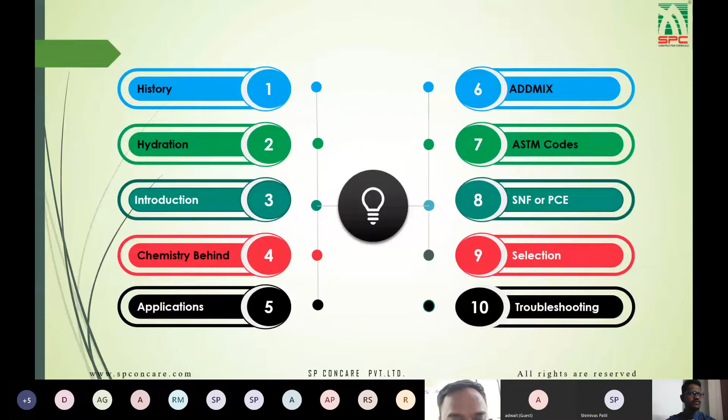So let's start with the history to see where it all began. In 1873, the first patent of calcium chloride was filed, all the way back in Germany. Calcium chloride is a more effective and least expensive accelerator, but nowadays its use is prohibited due to increased chances of corrosion of the reinforcement. Next, in 1930, modern admixture technology, such as water reducers, retarders, and air entraining admixtures, grew in use in North America between 1930 and 1950.

Next, in 1962, due to growing use of admixtures, ASTM published the C494 standard, which sets performance criteria for 5 types of admixtures: A, B, C, D, and E. Later in the 1980s, they introduced two more types, F and G. We'll see the details later. Next, in 1979, corrosion inhibiting admixtures were introduced, which help protect the reinforcement from corrosion, especially in coastal and industrial areas.

In the 1980s and 1990s, the use of high range water reducers, or PC based admixtures, grew as people realized their effectiveness for higher slump and durability at a low water cement ratio. Their advantages were recognized, and their use grew from the 1980s to 1990s. A few years later, in 1996, shrinkage reducing admixtures were introduced, which help protect concrete from cracks, for example from freeze and thaw conditions or due to shrinkage.

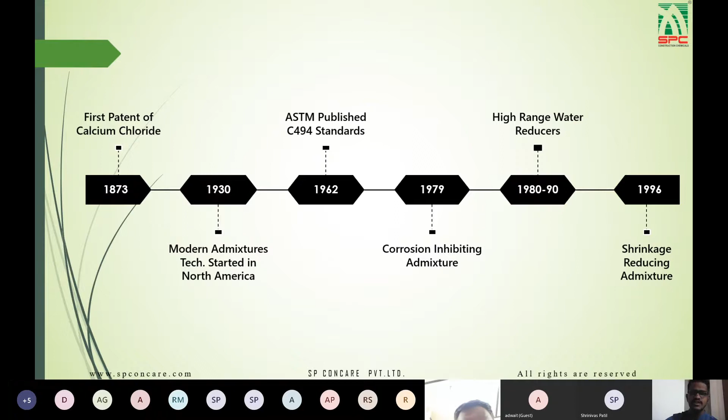After 1996, another admixture was introduced, known as the viscosity modifying admixture, which was recently developed and is mostly used for self-compacting concrete, or SCC concrete. So this was all about history. Now we are talking about hydration reaction. So what is hydration reaction? Hydration reaction is basically a reaction with water.

Here we are going to see what happens when we add water to cement. Basically cement contains 5 contents. The first is tricalcium silicate, C3S. Second is dicalcium silicate, C2S. Third is tricalcium aluminate, C3A. Then tetracalcium aluminoferrite, also known as ferrite, C4AF, and then gypsum.

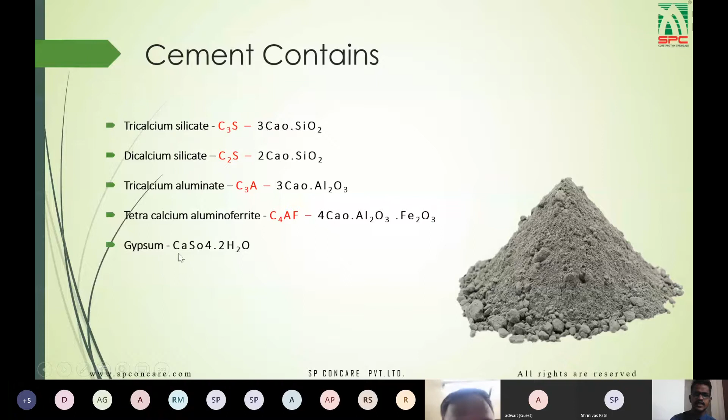We are going to see the reaction with water. The first reaction is tricalcium aluminate with gypsum and water. The C3A reacts with water and gypsum to form ettringite, producing a large amount of heat during hydration. This compound, ettringite, does not contribute to the strength of concrete, but it gives durability to the concrete.

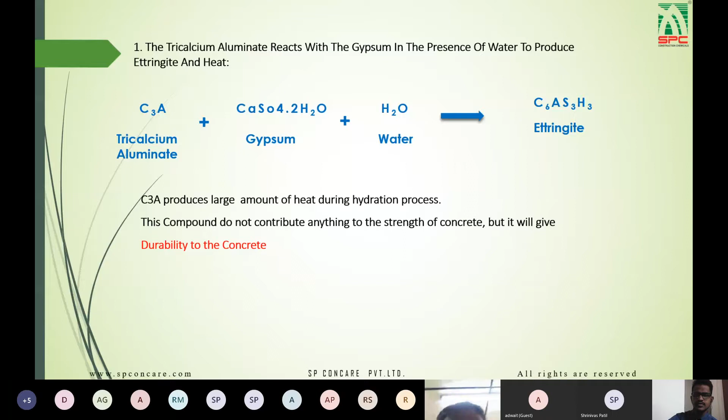Next is the reaction of tricalcium silicate with water. The C3S reacts with water to form calcium silicate hydrate (CSH) and calcium hydroxide (Ca(OH)2). This reaction produces high heat and is fast. The CSH produced has a short network fiber structure, which contributes greatly to initial strength of the cement.

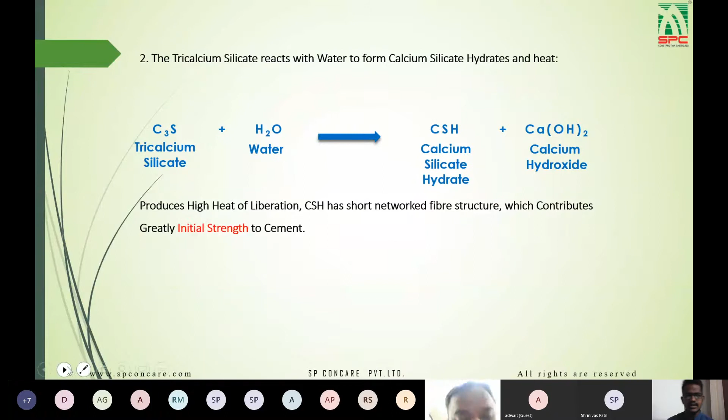Next is the reaction of dicalcium silicate with water. The C2S also reacts with water to form calcium silicate hydrate and calcium hydroxide, similar to the previous reaction, but much slower and producing less heat. The CSH from this reaction contributes to the strength of the cement paste slowly at first, but this compound is responsible for the long-term, or final, strength of the cement.

As per the first reaction of tricalcium aluminate, gypsum, and water, ettringite is produced. Once the gypsum is used up, the remaining ettringite reacts with the tricalcium aluminate in the presence of water to form monosulfate crystals.

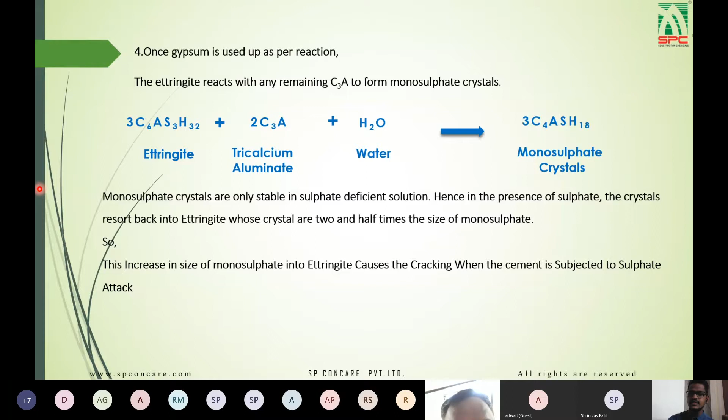The monosulfate crystals are only stable in a sulfate-deficient solution. So if the concrete is subjected to sulfate attack, the crystals revert back into ettringite, whose crystals are 2.5 times the size of monosulfate. This increasing size causes cracking when the cement is subjected to sulfate attack.

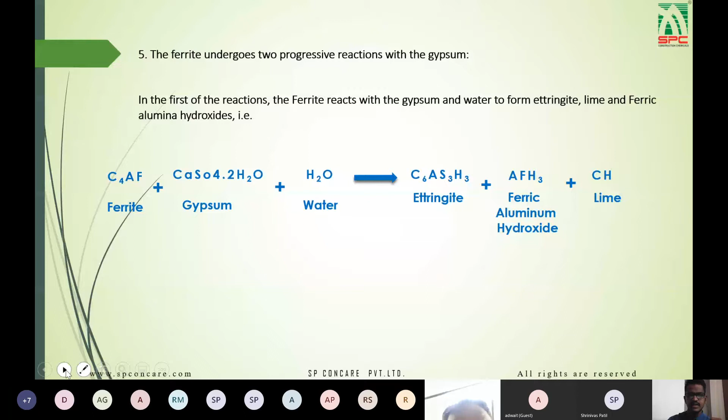Now the last reaction, the reaction of ferrite. Ferrite undergoes two progressive reactions with gypsum. First, ferrite reacts with gypsum and water to form ettringite, producing lime and ferric aluminum hydroxide along with ettringite. Next, this ferrite further reacts with the ettringite, lime, and water to produce garnets and ferric aluminum hydroxide. These garnets only take up space and do not contribute to the strength of the concrete.

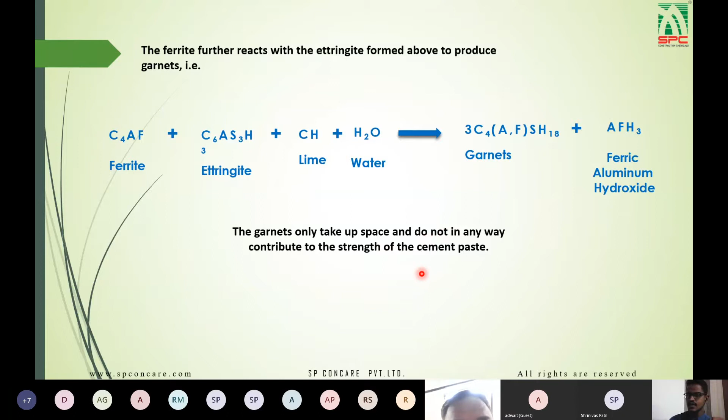So this was all about the hydration reaction. Now we are going to talk about admixtures. What are admixtures? Admixtures are substances added to concrete to improve its performance, such as controlling setting time, workability, and other cement properties, in order to meet the requirements of complex modern structures.

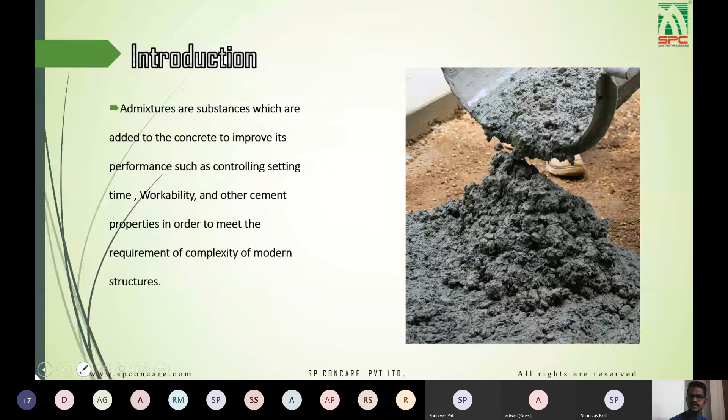What does this mean? For example, for precast manufacturers, their production rate mostly depends on the rate of hardening of their concrete. The more the hardening rate, the more their production rate, so they use admixtures to increase the hardening rate. Similarly, for RMC producers, unlike precast manufacturers, they want to delay the setting time of concrete, so they also use admixtures, but to delay setting time. We'll see how later.

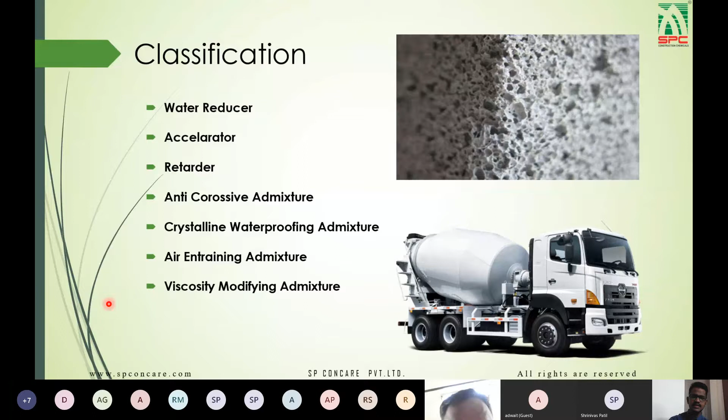So these are the types of admixtures: first, water reducers; second, accelerators; third, retarders; then anticorrosive admixtures, followed by crystalline waterproofing admixtures, then air entraining admixtures, and then viscosity modifying admixtures. We are going to see these one by one. First is the water reducer, also known as plasticizer. So what does a water reducer do?

The water reducer admixture helps to reduce the water cement ratio while maintaining a required level of consistency, and ultimately it increases workability while preventing bleeding or segregation issues. In most cases, when excess water is added, bleeding and segregation issues occur. So to prevent that, water reducer reduces the water cement ratio while maintaining the required consistency, and ultimately increases workability.

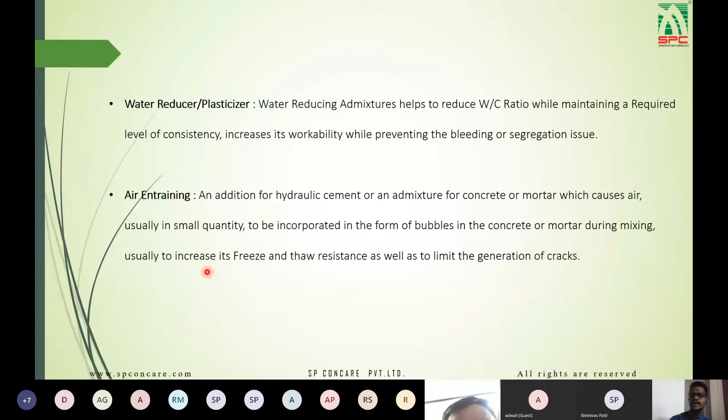Next is air entraining admixtures. This is an addition to hydraulic cement or an admixture for concrete or mortar which causes air, usually in small quantity, to be incorporated in form of bubbles during mixing. So when we add air entraining admixture into the concrete, it incorporates a small quantity of air bubbles. This usually increases freeze and thaw resistance, as well as limits the generation of cracks.

Accelerators. An accelerator is an admixture which, when added to concrete, mortar or grout, increases the rate of hydration of hydraulic cement, or shortens the setting time of concrete, or increases the rate of hardening or strength development. So it can shorten the setting time of concrete, increase the rate of hardening or strength development, or increase the rate of hydration of hydraulic cement. Basically it has two types: early setting admixture and early strength admixture. Early setting admixture can reduce the setting time of concrete as well as increase strength development, whereas early strength admixture just increases strength development and does not affect the setting time of concrete.

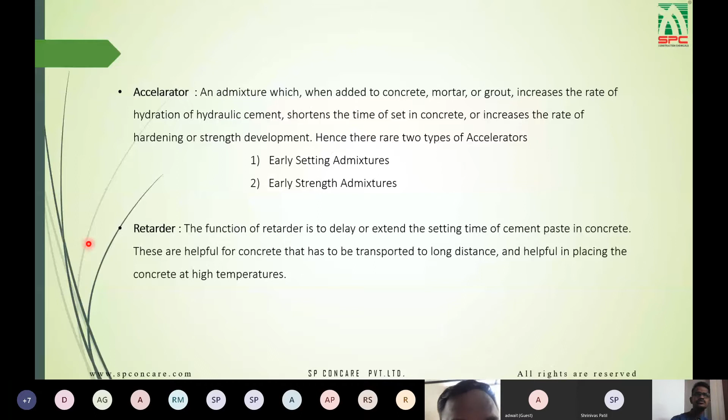Retarder acts in the opposite way of accelerator. Where accelerator reduces the setting time of concrete, retarder delays the setting time of concrete. So the function of retarder is to delay the setting time of cement paste in concrete. These are mostly helpful for concrete that has to be transported long distances, or for placing concrete in higher temperatures. Long distance mostly means in RMCs, so retarders are mostly used in RMCs.

The next is corrosion inhibitor. The corrosion inhibitor can be used as a defensive strategy for concrete structures such as marine facilities, highway bridges, parking garages, or structures exposed to higher concentrations of chloride. When we add a corrosion inhibitor admixture to the concrete, it forms a coating around the reinforcement of the concrete. So when it is subjected to a higher concentration of chloride or corrosion-causing chemicals, it protects the reinforcement of the concrete.

Next is crystalline waterproofing admixture. This is a recently developed crystalline waterproofing admixture. It reacts with the free lime present in the concrete in presence of moisture, and generates crystals which block the porosity and capillaries, making the concrete totally waterproof. So we can say this is the admixture which makes the concrete waterproof.

The last is viscosity modifying admixture, also known as VMA. VMAs are used to produce self-compacting concrete, which modifies the viscosity of the concrete. That's why it's mostly used in self-compacting concrete, which is used for casting heavily reinforced sections or complex shapes where regular concrete cannot approach. That's where self-compacting concrete occurs.

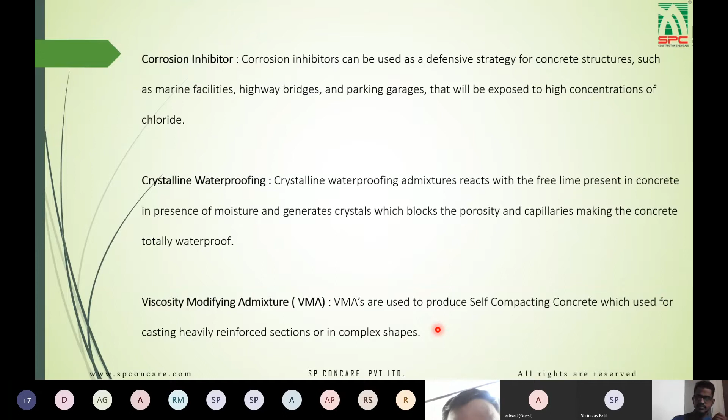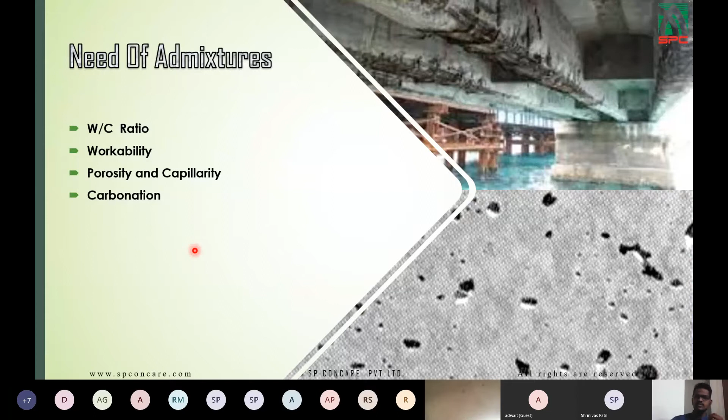This was all about the types of admixtures. But now, why do we need admixtures? What are the reasons that we may need admixture? Basically there are four possible reasons: water cement ratio, workability, porosity and capillarity, and carbonation. These are the four major reasons why we need admixture, and there are four reasons related to each other. How? That's how we are going to see.

As I said, in the hydration reaction you need water to complete the reaction. But how? For that, the water cement ratio comes in. What is water cement ratio? It is kg of water per kg of cement, mostly around 0.25 to 0.3. So if you have taken 100 kg of cement, as per the water cement ratio, around 25 to 30 liters of water is sufficient for that. But in general concrete construction, water is added in excess of that necessary for hydration to improve workability, making it easier to transport, place, compact and finish. But when excess water is added, it evaporates during hardening, which leaves voids in the concrete, capillaries, pores, cracks, and air spaces of varying dimensions.

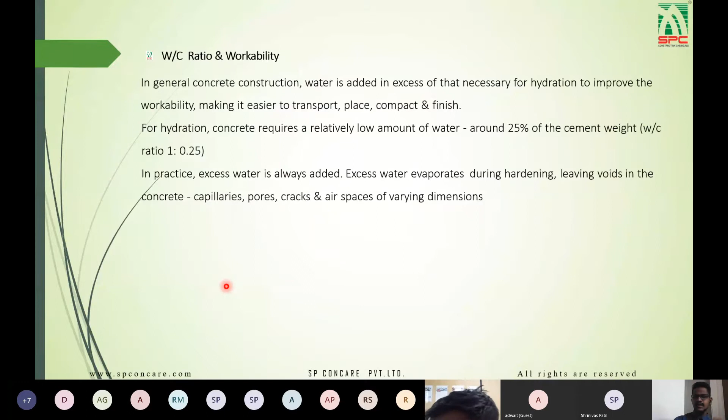So next is porosity and capillarity. When you add excess water, it leaves capillary pores formed as the water migrates to the surface of concrete during hydration. These micro cracks create a route deep enough to expose embedded steel to the risk of corrosion. So if water molecules or any other chemical or substance causes the reinforcement to corrode, this is the major way for that to happen.

So suppose we take an example of carbon dioxide. Now suppose this CO2 enters through that porosity into the concrete. What will happen? This CO2, as per the first reaction I mentioned, reacts with dicalcium silicate and tricalcium silicate, and calcium hydroxide is produced.

Now, when this CO2 enters the concrete or comes in contact with it, this CO2 and calcium hydroxide react with each other, ultimately forming calcium carbonate and water. This calcium carbonate is porous and brittle in nature, and this property affects the strength of the concrete.

On the other hand, simultaneously, this CO2 reacts with the moisture, or the water present in the concrete, forming carbonic acid, that is H2CO3. As the name suggests, this is an acid, and this acid and the water are more than enough to cause corrosion of the reinforcement.

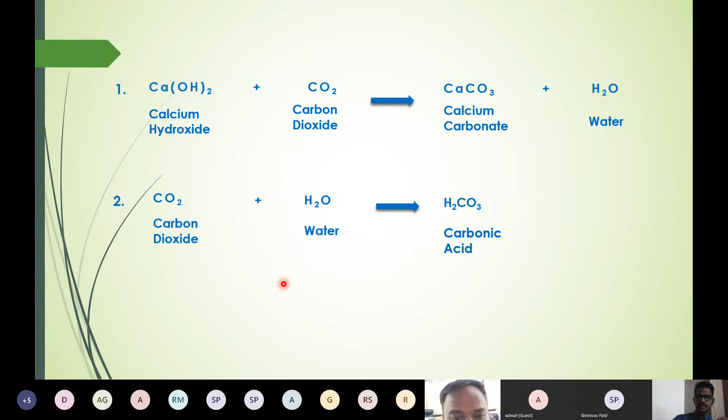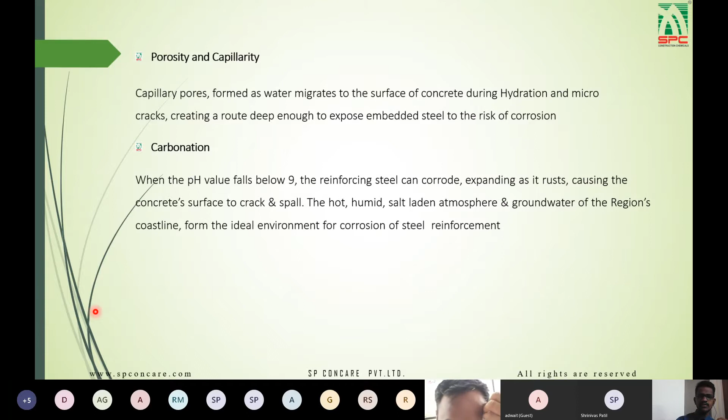So when the pH value falls below 9, the reinforcing steel can corrode and expand as it rusts, causing the concrete surface to crack and spall. The hot, humid, salt-laden atmosphere and groundwater of the region's coastline form the ideal environment for corrosion of the steel reinforcement. So these are the reasons why we need admixtures.

So this is the graph that I took from the Civil Engineering Journal, volume 4, number 8. The porosity of concrete directly affects its strength. The more the porosity, the lesser the strength, and porosity depends on the water-cement ratio. Here, as you can see in the graph, on the x-axis you can see the water-cement ratio from 0.3 to 0.9.

On the y-axis, you can see the compressive strength in MPa for 28 days compressive strength, and on the left-hand side, the compressive strength in PSI. As you can see here, at 0.32 this value is higher, and as the water-cement ratio goes on increasing, the compressive strength value decreases. Here it's around 50 MPa, and as you keep increasing the water-cement ratio, this value starts reducing. So the more the water-cement ratio, the lesser the strength; the more the porosity, the lesser the strength.

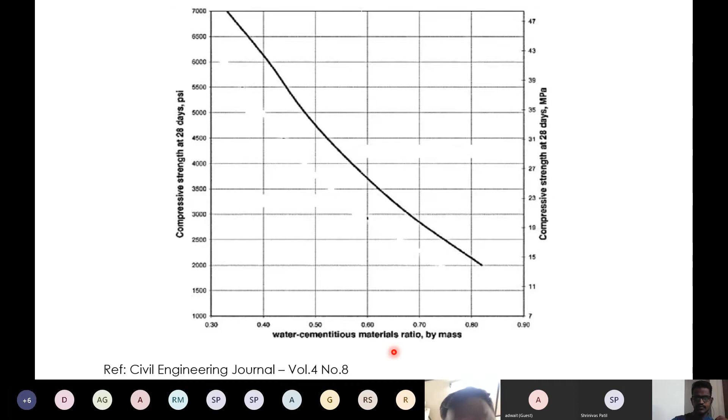For that, SP Concare Private Limited has designed admixtures under the brand name Addmix. So these are the products of SP Concare Private Limited.

Under the water reducer section, we have Addmix 210 and Addmix 310, which are water reducers with slight retention. Next is accelerator, under which we have three products: Addmix 200, Addmix 200X, and Addmix 389. Addmix 200 is an early strength admixture, whereas Addmix 200X is an early setting admixture. The third, Addmix 389, is a PC-based admixture which gives you early strength as well as water reduction.

Next is water reducer and retarder. As you can see here, Addmix 215, Addmix 240, and Addmix 248 are SNF-based admixtures. And Addmix 300, Addmix 315, and Addmix 345 are PC-based admixtures.

Under the wet mix method, mostly used by precast manufacturers, in order to protect the mold from wear and tear, they use an admixture. Addmix 326 is that admixture. It protects the mold from wear and tear, and also improves these properties.

Next is corrosion inhibitor admixture. For corrosion inhibitor admixtures, we have Addmix 55. Next is air entraining admixtures. Under air entraining admixtures, we have two: Addmix 152, now known as Addmix Cellucrete, and Addmix 700.

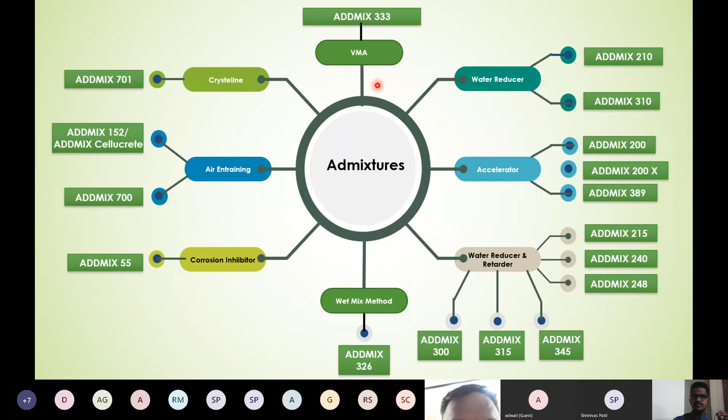Next is crystalline admixtures. For crystalline, we have Addmix 701, which is recently developed. We are going to talk about Addmix 701 later on. Next is VMA, that is viscosity modifying admixture, Addmix 333, mostly used in self-compacting concrete.

These are the ASTM C494 standards, introduced in 1960, which set a performance criteria for different types of concrete admixtures. Type A represents water reducing admixtures, Type B represents retarding admixtures, Type C represents accelerating admixtures, Type D represents water reducing and retarding admixtures, and Type E represents water reducing and accelerating admixtures.

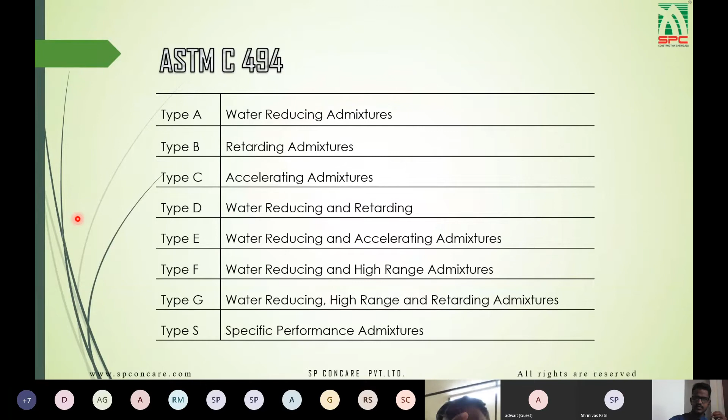Type F represents the water reducing and high range admixtures, type G represents the water reducing, high range and retarding admixtures, and type S represents the specific performance admixtures. These are the products of SP Concare, which follow the ASTM C494 codes.

Addmix 700 follows ASTM C494 type A and type D. Addmix 55 follows type C. Addmix 105 follows type B and type D. Addmix 200 follows type C. Addmix 200X follows type C again.

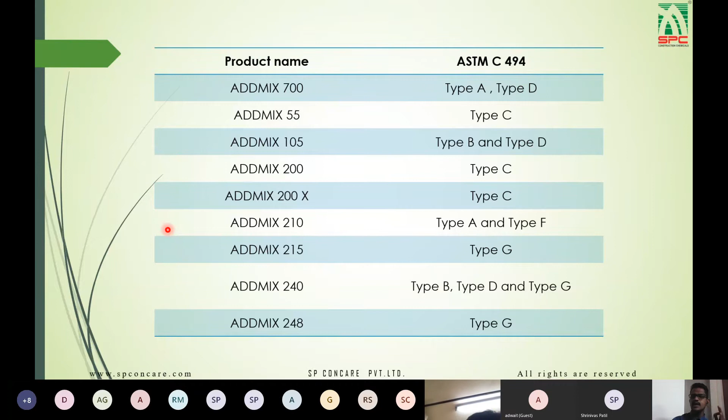Addmix 210 follows type A and type F. Addmix 215 follows type G. Addmix 240 follows type B, type D, and type G. Addmix 248 follows type G.

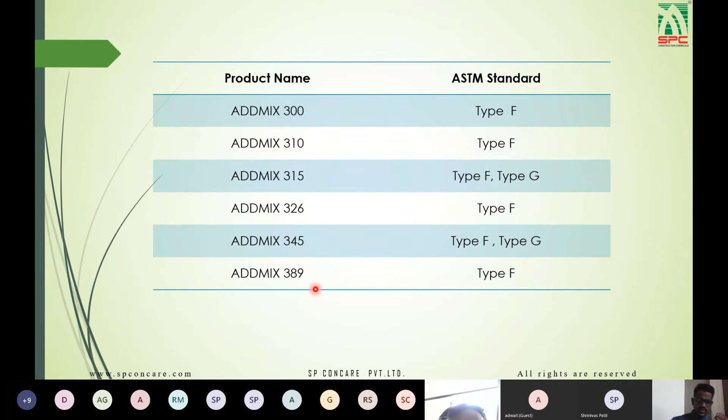So what is the difference between SNF base and PC base? We are going to see the chemistry behind it. First is SNF based admixtures. What is SNF? SNF means sulfonated naphthalene formaldehyde. SNF based admixtures work on a principle based on the electrostatic force of repulsion between negative charged ions.

When you add the SNF based admixture to the concrete, it deposits negative charged ions on the surface of the cement molecules, making the molecules repel each other, which ultimately results in making the concrete flowable.

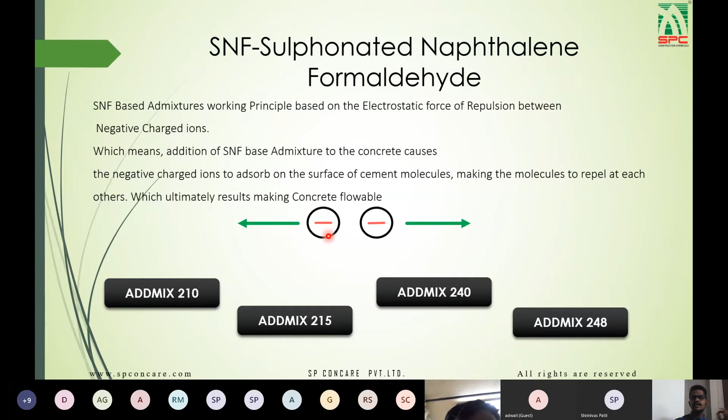So what is electrostatic force of repulsion? When the same charged ions come near to each other, they repel each other in opposite directions. As you can see here, this is the cement molecule and this is the cement molecule.

When you add SNF-based admixture to the concrete, these negative charged ions are deposited on the surface of the cement - this negative charged ion and this negative charged ion. So this negative charge and this negative charge ion repel each other in opposite directions.

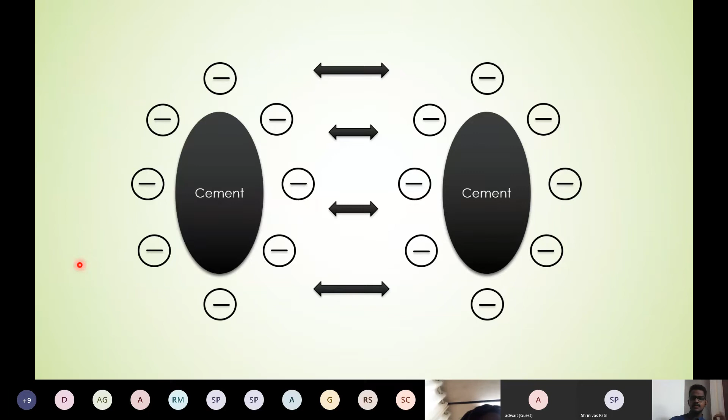Further, here is the next particle of cement and here is the next particle of cement. This particle repels this particle in opposite direction, and further this particle repels this particle in opposite direction. In this way, the flow of the concrete is achieved - we prevent the flocculation of the concrete, and then we ultimately get the flow of the concrete.

So the next is polycarboxylate ether, PCE. This PC works on a principle based on steric hindrance. What is steric hindrance? We can say steric hindrance causes the inability of the particle to participate in a reaction.

This effect prevents the particles from coming closer to each other as a result of the presence of ether chains adsorbed on the surface of cement particles. So when we add PCE based or polycarboxylate ether based admixture into the concrete, it deposits the ether chains on the surface particle of the cement.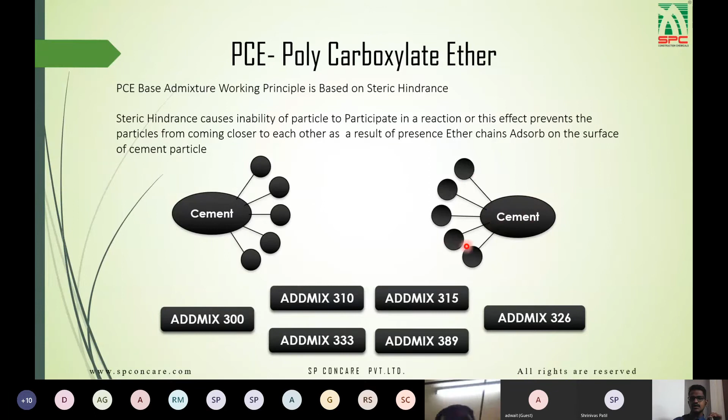So this is the cement particle, and on the surface of the cement particles, this is the ether chain - this is the ether chain and this is the ether chain. Here you can see this cement particle, this cement particle, this cement particle, and this is the ether chain.

So when we add the PC-based admixture into the concrete, these ether chains are adsorbed on the surface of the cement. Now, ether is a higher molecular weight compound.

Due to the presence of these higher molecular weight ether chains, they prevent the cement particles from coming near each other. This may create a gap between these two, and this prevention causes the flow of concrete.

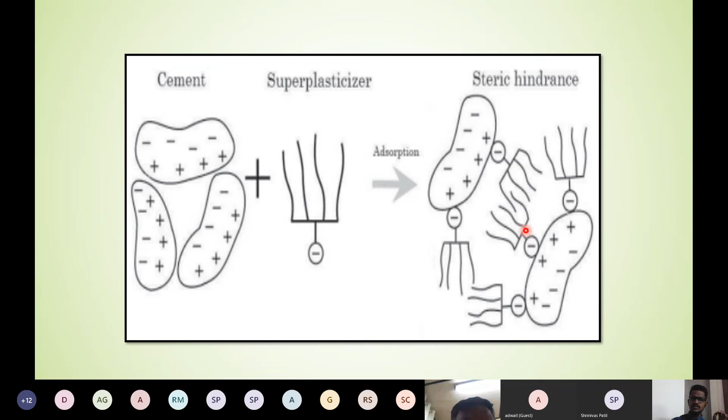So due to this ether chain, the molecule is prevented from coming close to others, same for the other particles, and in this way you get the flow of the concrete.

So that is how you can decide - how you can choose the SNF based admixture or PC based admixture.

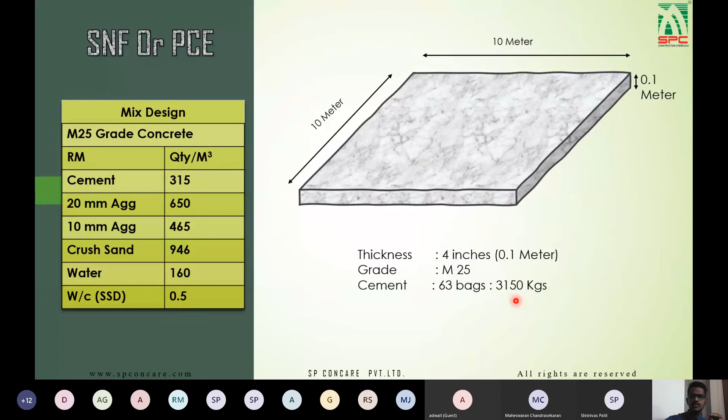For the SNF based admixture 215, we consider a dosage of 1.2% of total cement quantity, or 600 ml per bag of cement. On the other hand, the dosage for 315 is 0.7% of total cement quantity, or 350 ml per bag of cement. So for 1.2% of 3150 kg cement, that comes to around 37.8 kgs. For 315, it comes to 22.05 kgs.

The basic retailing price of admixture 215, excluding GST, is 45 rupees per kg, whereas admix 315 is 75 rupees per kg. So the total quantity of 215 required is 37.8 kgs at 45 rupees per kg, costing a total of 1701 rupees. On the other hand, for 315 the total cost is 1653.75 rupees.

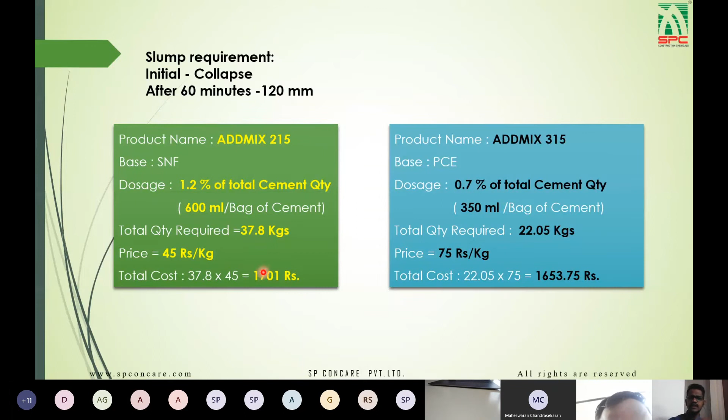Here you can see the final costing of the PC based admixture is lesser than the SNF based admixture. Why? Due to the lower dosage of the admixture, it provides much better performance than SNF at a lower dosage. So even though it has a higher price than SNF, due to the lower dosage it ends up equal to or lesser than the SNF based option.

So up till now you saw how admixtures work, why we need them, and what they are. But how can you tell which admixture to use for different cases? For early strength, you can use admix 200. For early setting, you can use admix 200X. So if you only want early strength development, use admix 200; if you want early setting time, use admix 200X.

Next, if you want water reduction as well as waterproofing, you can use admix 701 and admix 700. Admix 701 is a crystalline admixture, while admix 700 is an integral waterproofing admixture as well as an air entraining admixture.

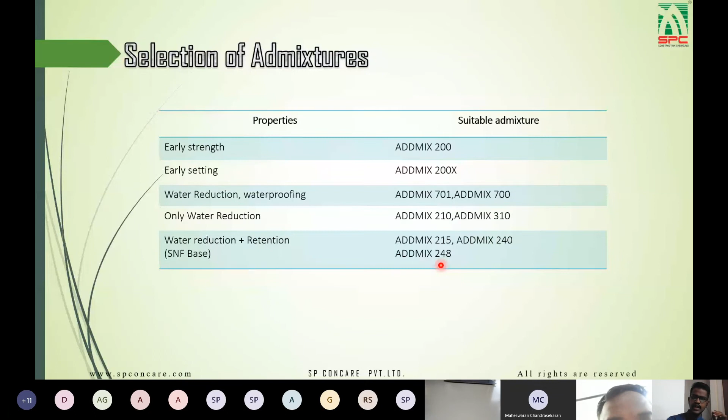If you want only water reduction, you can use admix 210 and admix 310, but these come with slight retention, so it's water reduction plus retention. If you want SNF based water reducer with retention, use admix 215, admix 240, or admix 248. For the same case with PC based admixture, you can use admix 300, admix 315, and admix 345.

For corrosion inhibition, especially in coastal or industrial areas, you can use admix 55. For air entraining admixtures, you can use admix 152, also known as admix Cellucrete, or admix 700. If you want early strength with high range water reduction, use admix 389, and for the wet mix method, use admix 326.

There is another admixture you can use as a viscosity modifying agent: admix 333.

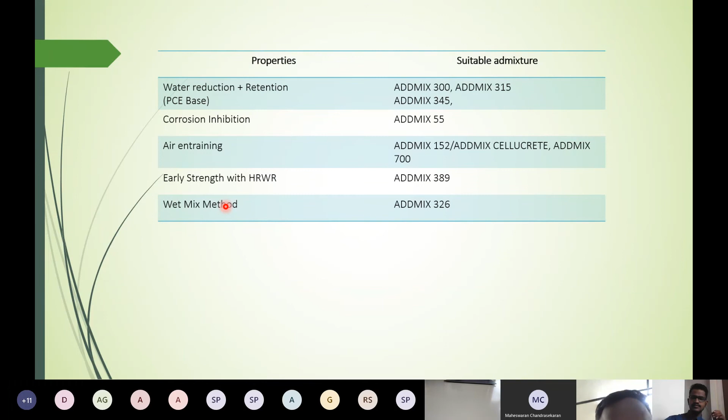So where can you use admixtures? You can use admixture in low slump concrete, in site batch concrete and ready mix concrete, in pre-stress concrete, in precast elements, and in railway sleepers. You can use admixture for high performance concrete or self-compacting concrete, in cold or hot weather concrete, in corrosion resistant concrete, and also in wet shotcrete mix.

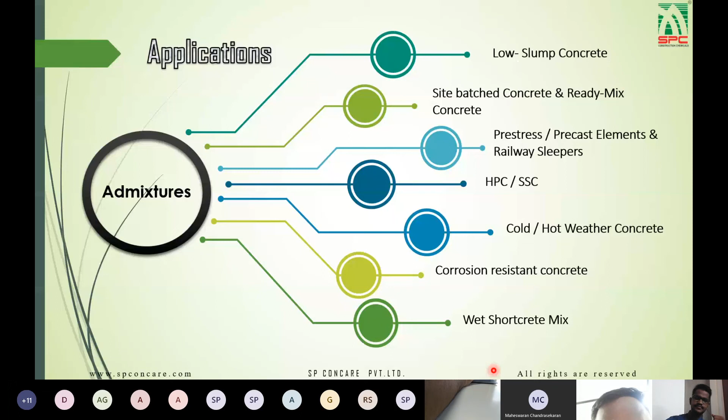So troubleshooting. In many cases concrete has to face many problems or troubles. These troubles we are going to discuss today, and we are also going to provide the possible reasons and the solutions. So first is bleeding and segregation. Why does bleeding and segregation occur?

The first reason is due to excess water. So what is the solution? You can either reduce the water dosage, and to compensate for workability, you can use a water reducing admixture. Sometimes due to overdosage of admixture, this can also happen. So what is the solution? Just reduce the dosage. Next problem is generation of cracks.

The possible reason is shrinkage, so you can use a shrinkage reducing admixture. And the second reason is freeze and thaw condition, and for that you can use an air entraining admixture.

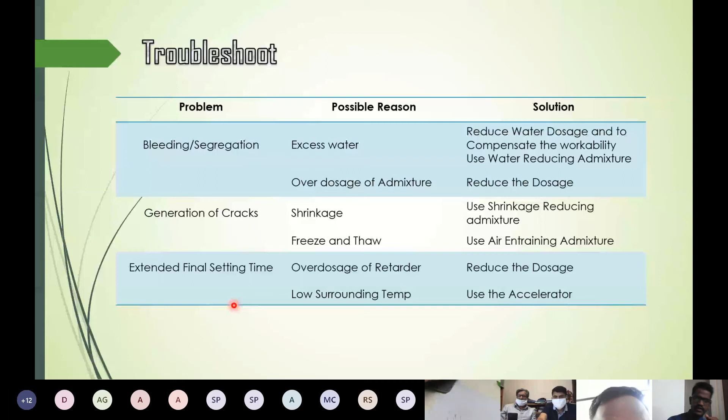Another problem is extended final setting time. The solution for overdosage of retarder is to reduce the dosage. Another possible reason is due to low surrounding temperature, which also affects the setting time of the concrete and can extend the setting time. So for that, use an accelerator.

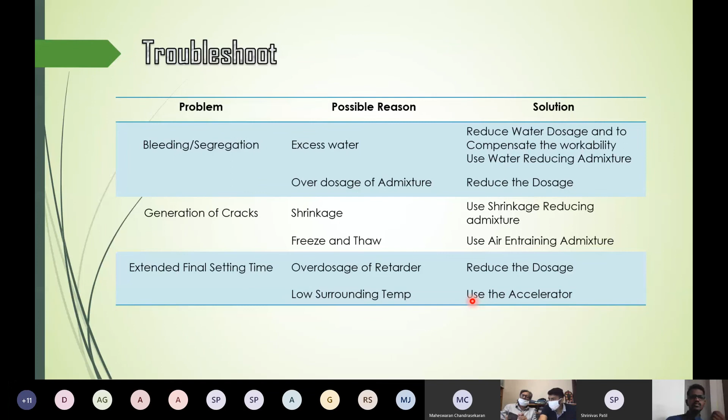Next problem is problems in early setting time. Insufficient dosage of accelerator may cause this problem, so increase the dosage of the accelerator. Again, due to low surrounding temperature, this may also happen, so use the accelerator. Next problem is scaling or efflorescence on the surface of the concrete.

This may happen due to excess water dosage. So just reduce the water dosage and use water reducing admixtures.

Next is reinforcement corrosion. Why does reinforcement corrosion occur? Due to water penetration into the concrete, so just use anti-corrosion admixtures. Or due to the carbonation process in concrete, reinforcement corrosion may happen, so use anti-carbonation coating.

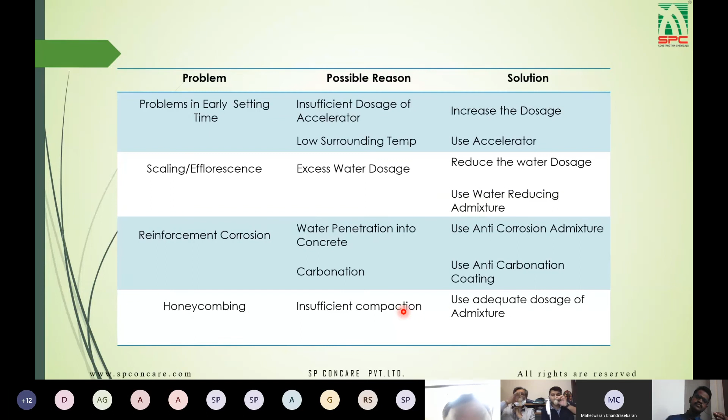Last problem is honeycombing. Honeycombing may occur due to insufficient compaction. When bleeding or segregation happens, due to insufficient compaction, honeycombing may happen, so use an adequate dosage of admixture. But if after construction honeycombing occurs, you can use our product, Durocon 49, to repair it.

Recently SP Concare Private Limited has developed a new product, Addmix 701. You can say this is an all-rounder product. So what is the product? It is a unique crystalline additive for concrete that forms pore blocking crystal fibers in the presence of moisture present in the concrete. This also acts as a super plasticizer and permanently waterproofs the concrete.

So this admixture acts as a super plasticizer. It acts as a waterproofing agent. It also seals cracks. It increases the freeze and thaw resistance.

So there are many specifications of this particularly unique admixture. It is a super plasticizer. It resists the positive and negative hydrostatic pressure and increases concrete strength. It can seal cracks up to 0.4 mm. It increases the freeze and thaw resistance of concrete. It is non-toxic and also chloride free.

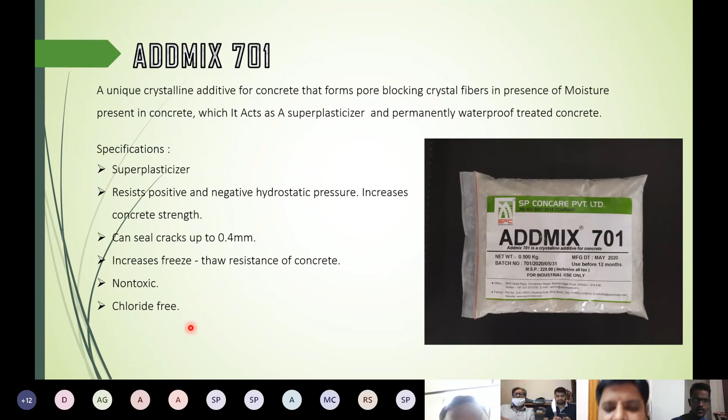Using Addmix 701, we have developed a new system, the Mr. Dry system, which is used during construction to make your concrete waterproof. This is the comparison between the Mr. Dry system and the traditional method. The traditional method is used after construction of the concrete, and the Mr. Dry system is used during construction of the concrete.

For comparison, we considered a basement raft of 3 meter by 3 meter having a thickness of 0.15 meter, with a 3 meter height retaining wall, of M20 grade concrete. In the traditional method, crystalline chemical coating is used along with coving of Durocon 49, which costs around 26,025 rupees. On the other hand, the Mr. Dry system, which includes the Addmix 701 explained earlier and Smartsil 185, a hydroswelling paste, costs only around 12,127.5 rupees. So here you can see the traditional method costs around 26,000, and the Mr. Dry system costs 12,000.

So the difference is around 13,000, meaning you are saving 53% of your money. So it is up to you to decide which method to use.

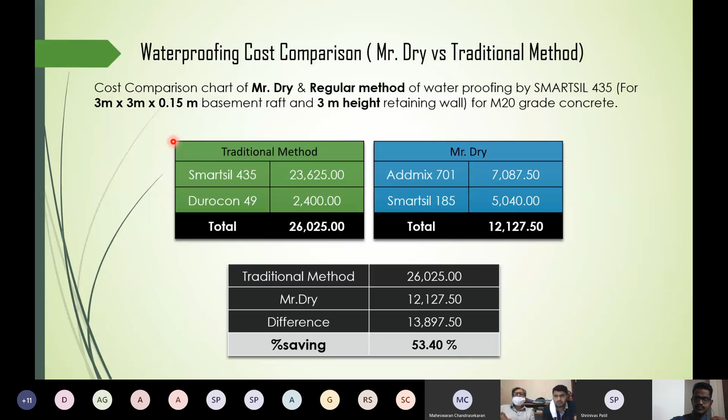So this was all about the admixtures. Thank you for your patience. If you have any question, please ask.